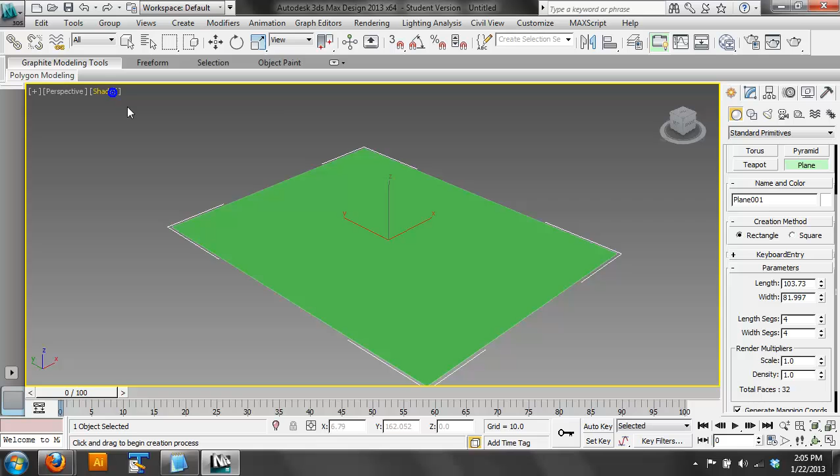But let's look at it in terms of a plane, and this actually gets us to another thing. Planes are really useful because you can start with them as just a simple topological field, right? We have a plane, it has 16 points on it. We can adjust the number of segments to it. It basically becomes a mesh for us to work with, a surface for us to work with.

We can do crazy things with it, like add a ripple modifier to it, which gives us the ability to play with the amplitude, and the wavelength determines the motion of the ocean. The plane is very nice because it gives us a surface to start with, and again, as I always say, the more segments you've got, the more resolution you get. It slows it down, right?

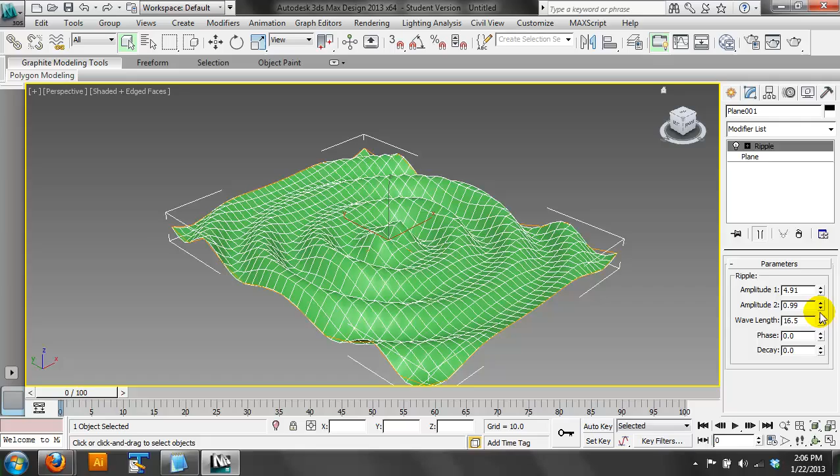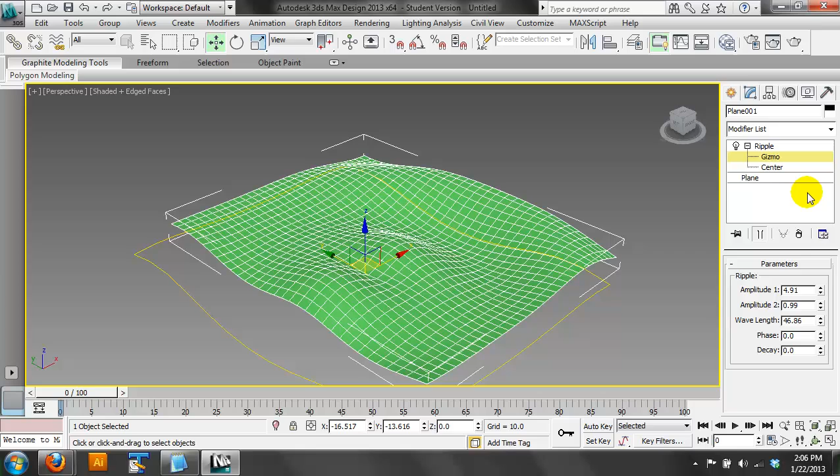But it does actually end up creating a smoother transition. You can also play with the gizmo of the ripple, sounds really weird, and you can move the centroid, move that ripple around in space to get the kind of thing you want. You can adjust the amplitude of it. So if you guys have ever wanted to do these kinds of things in your studio projects, this is one easy way to do it, the ripple modifier.

It gives me a great place to talk about the noise modifier. Now that I've got this surface that I've meshed, if you throw in a noise modifier, this just gives you random garbage. You have a strength in X, Y, Z. The most interesting right now is what? The Z, right? So if I begin to add some amplitude into Z, nothing's really happening yet, we've got to play with the settings here, but this just gives us...

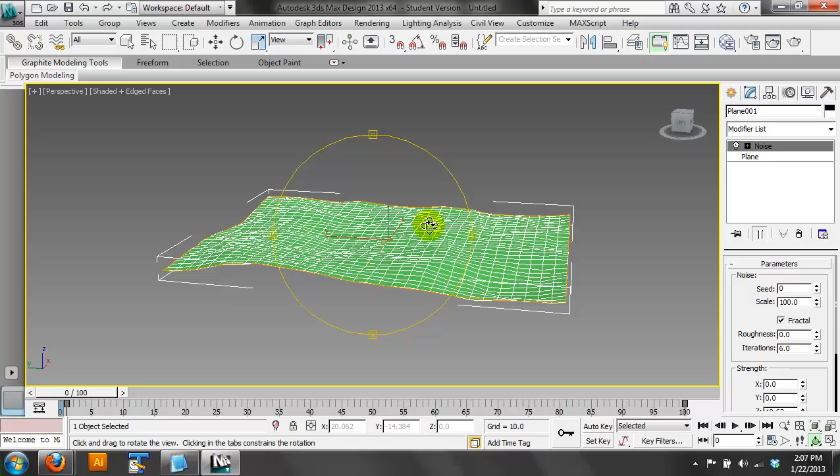You guys remember seed from Grasshopper? It's the random number that starts the calculation. With different seeds we get different output, so if I experiment with different seeds, I just get different configurations of noise.

And I can play with that scale too. I can make a double scale, 200. Actually, that might be the opposite of what I want. Yeah, it's the opposite. So the more you play with that scale, you can get this effect here. And it's just noise, that's all it is.

It's just pseudo-random noise. There's different settings for it. We don't usually talk about this, but fractal noise adds a bit more complexity to it. See that? It's kind of smooth, but now it's got additional ridges in it.

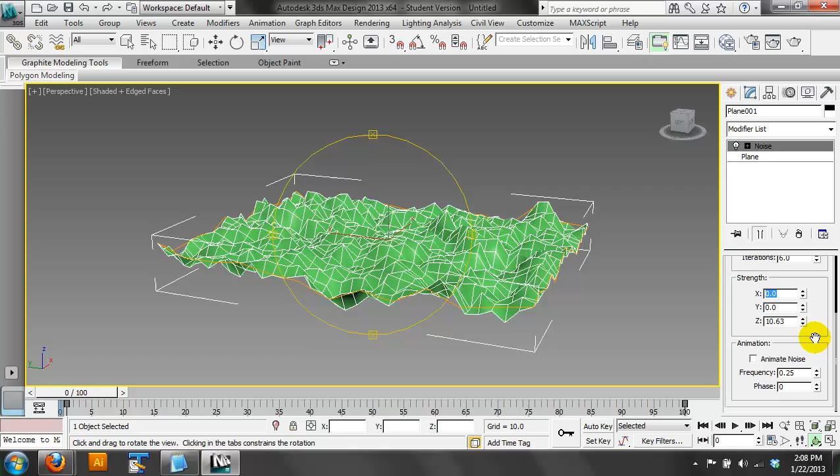You can have X and Y noise, so I can actually have a jitter in different axes. Like I can really mess this stuff up, so it becomes more crumbly, like a piece of paper.

All right, so with that, we can talk about how we would actually do our liquor bag.

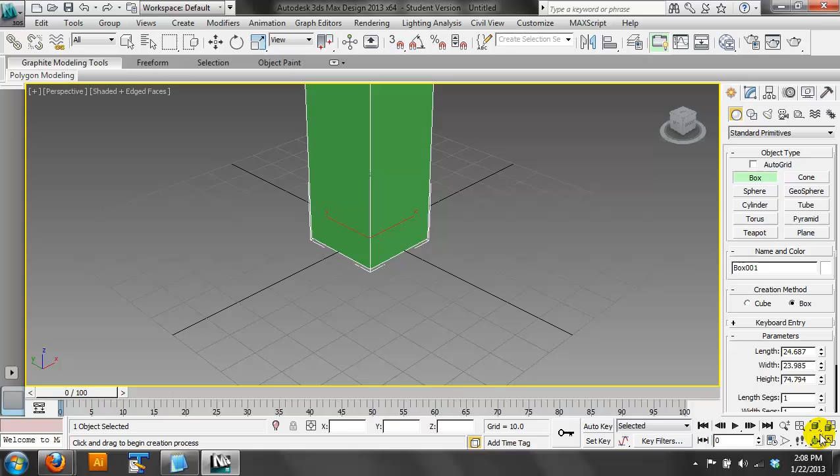Drugs are bad. What's that? Yeah, liquid courage bag.

Okay, so we got our box, and I'm going to go ahead and add some geometry. We need a lot of it, right? Because we're going to be brown bagging it here. So we need some of that, especially in the height parameter.

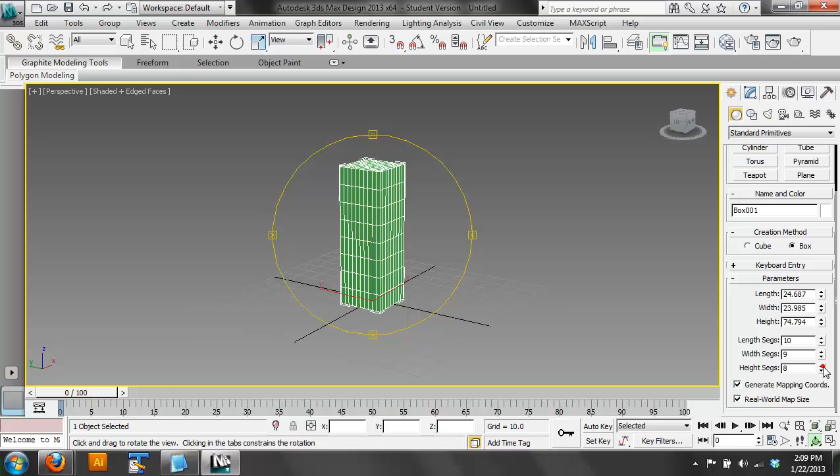So then we've got a lot of information there, and I could go ahead and actually— this actually might have complicated things for me, but let me back up.

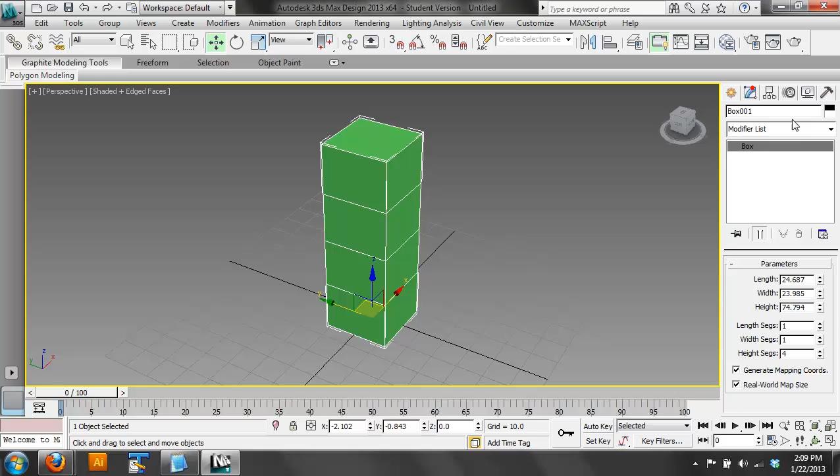What we really need to do is give it a couple of twists, right? I think like Dakota mentioned, it has kind of a twist and it has a taper.

So let's taper some of these at the top, and we'll just kind of eyeball this. We're not going to really be in super control over it, but good enough. It's a demo, so we're not very precise.

That's the issue, and then I'll just sort of start to twist this a bit, twist that a bit. Close enough, we think?

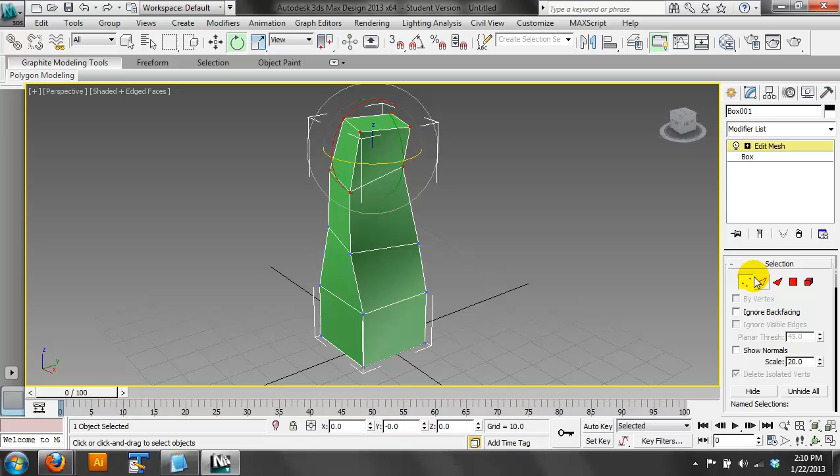All right, then what I want to do is go into Edit Mesh, and I'm going to select these, basically everything above the base. Because I want to keep the base pretty good. This isn't perfect, but it's pretty close.

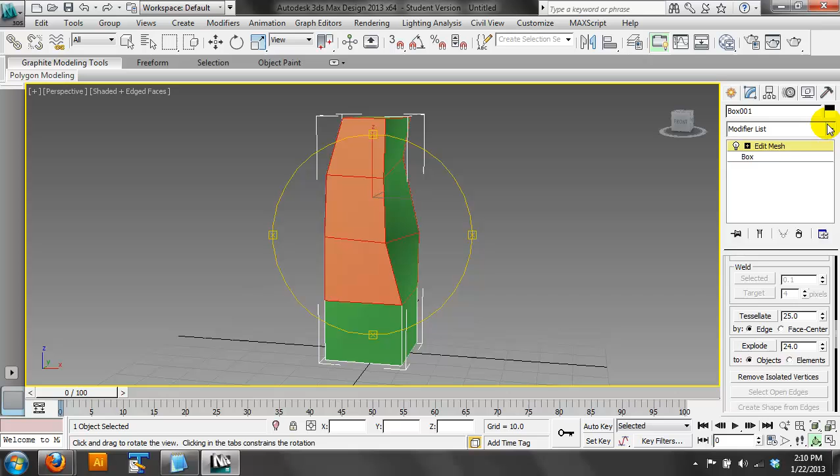Then what I'm going to do is, remember, I want to add some information after the fact, so I actually might want to look at tessellating it, or changing it to polys or something like that. Let's see what tessellate gives us here.

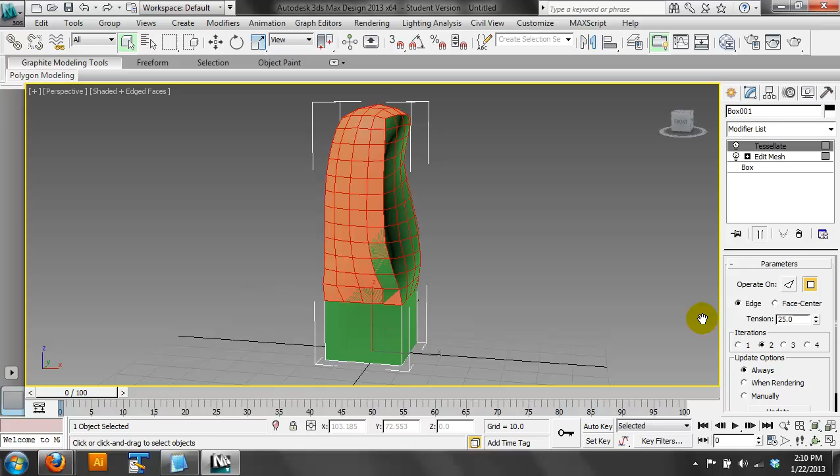Okay, so good, so I'm gonna add some more tessellations. I don't know why it's flickering like that. That is really troubling. Let's see here. What's that? I guess, I don't know.

There we go. So if we have zero tension, we can increase the number of iterations, and we get more meshes, we get more stuff.

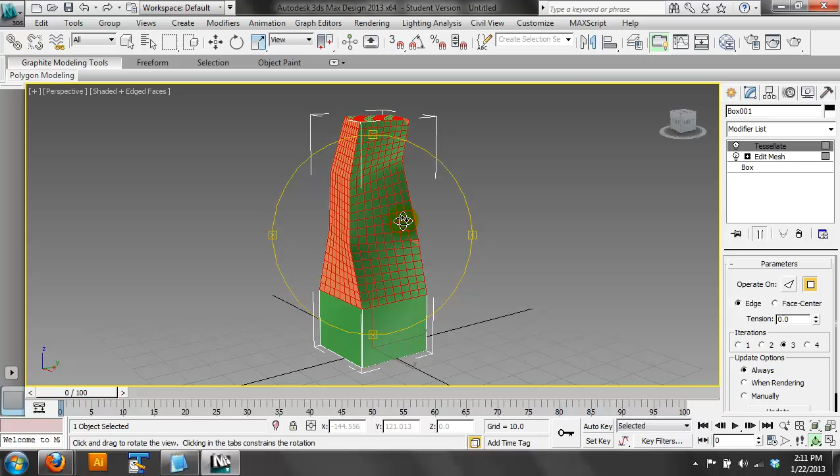Now I'm going to go ahead and add another edit mesh modifier to it because I want to edit it further down the stack here. And actually I want to go ahead and select all the vertices here. Actually, no, take that back.

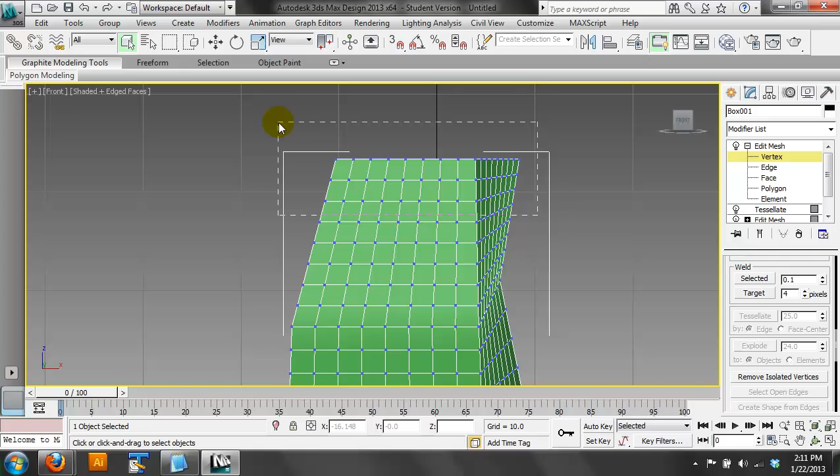Okay, so I'm going to select vertices at the top, the ones that are most—it gets really crumbly, and it gets less crumbly as it goes, right?

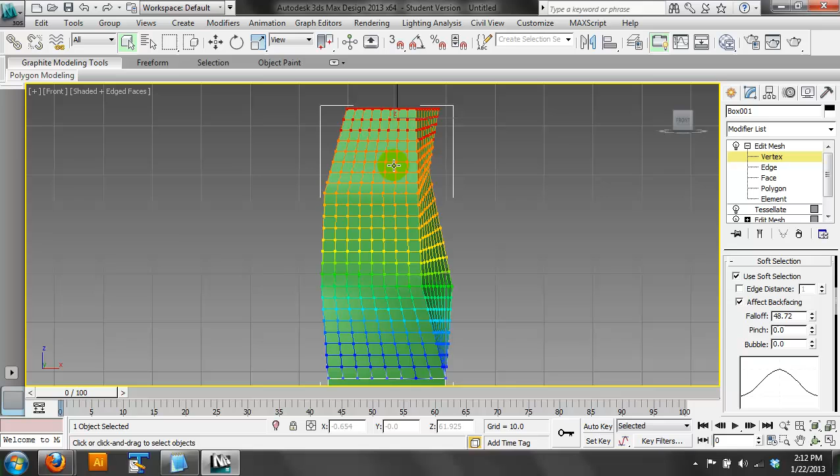So I'm going to go ahead, and we haven't changed this before, but you can do soft selection. What it means is I can select something, and then I can essentially increase that selection, but there's kind of a falloff. So these are really selected, these are kind of sort of selected, and then they're kind of not. You get kind of a gradient effect.

When I apply a modifier to it, like noise, then the effect of it is actually going to be propagated differently down the stack, and you'll see that in a second here.

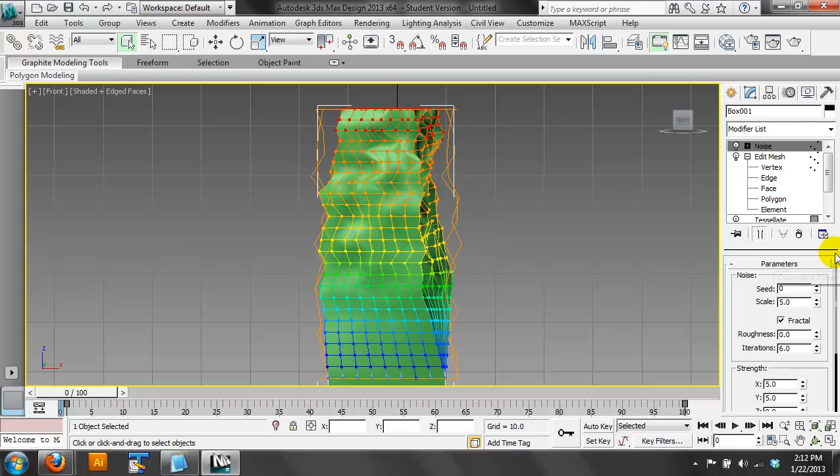So, see how the top is more noisy than the bottom? And let's go ahead and throw a little bit of Z in there too, just for good measure.

Okay, so if I go in, let's go ahead and go to edit mesh so I can just look at this thing as it is. And when that renders, you're not going to see all that other stuff, right? You're just going to see that transition, because that's just the mesh underneath it.

Now that's not exactly what we did. Let me close this off here. I think if I look at this closer, it looks like something happens here and it kind of propagates down a little bit. So I actually probably want fewer polygons at the bottom and more at the top, you know what I'm saying? We kind of want the noise to propagate.

There's too much information from row to row here. We want less rows, okay.

But to go back here, we had the box object, and we only had a few height segments, right? Then we modified it a bit. We went into the base mesh and selected some additional candidates that we wanted to add more information to - we wanted to tessellate it. So we did that, operating on the edge with polygons and a zero tension, and that gives us a square, kind of quads.

Then we went to edit mesh, did a soft selection. We started by selecting these vertexes, used soft selection, passed that up to a noise modifier, and then we just have an edit mesh to kind of kill that stack.

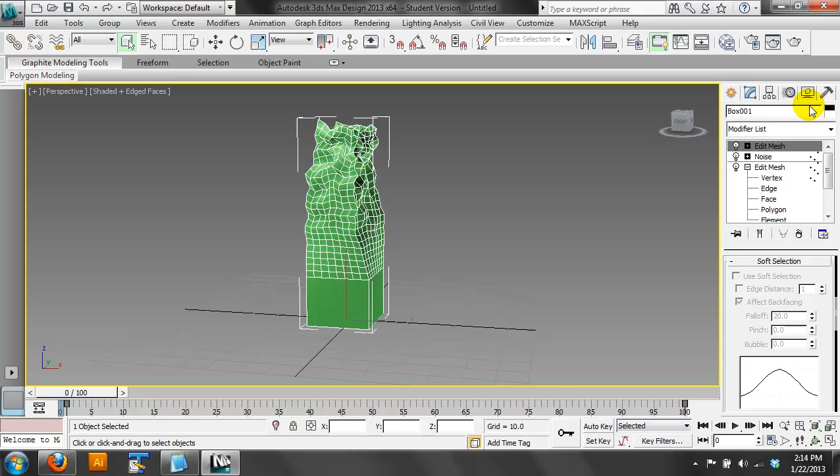In case you're curious, soft selection was kind of a curveball I just threw at you. Check this out, where soft selection might be of use. Remember the example I showed you with the ripple? The ripple, you don't have much control over, right? It just gives you these kind of amplitude waves. But what if you want a bulge in something?

You want like a bulge right there, okay, and you want it to be a certain size and a certain dimension - the ripple modifier is going to be tough to deal with. Soft selection is your friend.

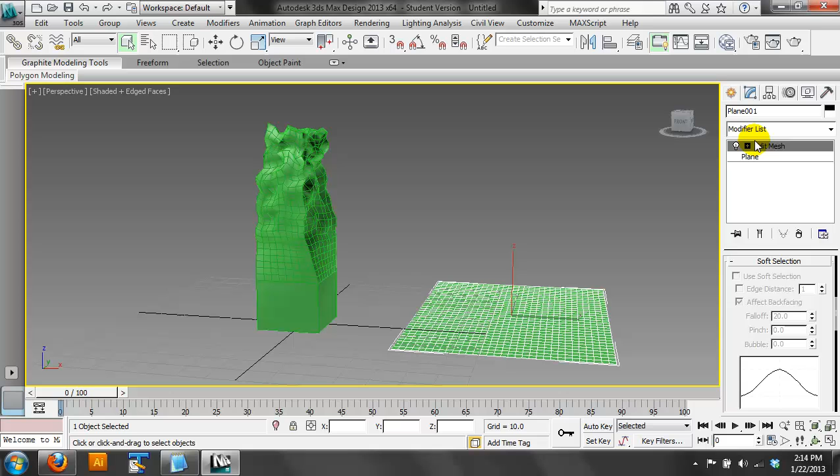So you go to edit mesh, you go to vertex level, you can even pick a point, and you go into soft selection, and there's your... so you can see it. It's just like a diagram here, right?

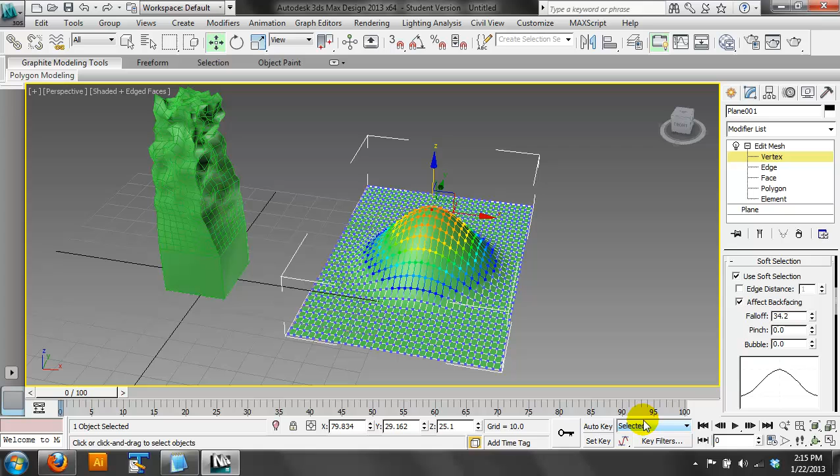Check this out, if I move this up and down. Remember, it's like sort of selected, less selected, not selected at all, right? The middle one gets moved to the full amount, and then everything else propagates out from that - it actually tapers out from that, and you get that bulge in there, okay?

And you can do that - I could go in and pick another one, and do the same thing. I could pick a corner, move it down a little bit, right, and I can start to sculpt this. It's another way to do it.

We saw FFDs, we saw all these other kinds of deformations - soft selection is another method of deformation. It works with anything, basically. You can do it with polygons, you can do it with any kind of selection.

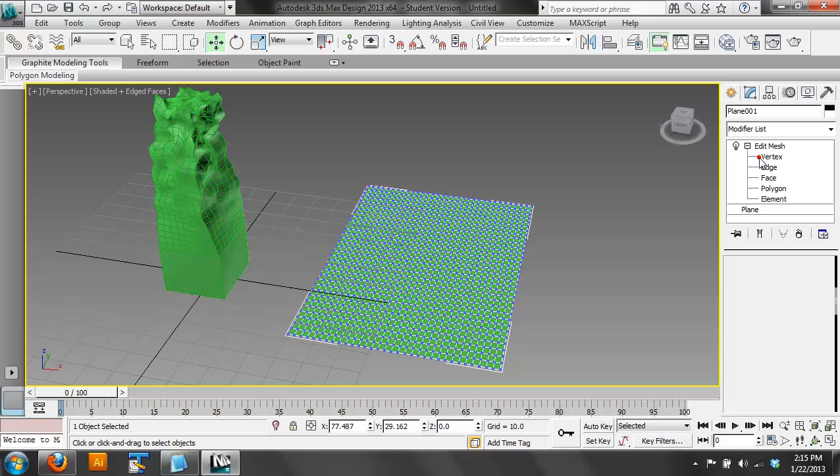Let me back this out a little bit. If I go into that edit mesh again, let me show you this. So soft selection, right? You can control the falloff, which is the distance that you get.

You can control the kind of pinch and the bubble, so you can actually control it. So if I do this, I get kind of a mesa kind of effect, or kind of a navel effect. There's different ways - if you adjust that curvature, that's the kind of falloff effect you'll get with your selection. So you have tons of control over this.

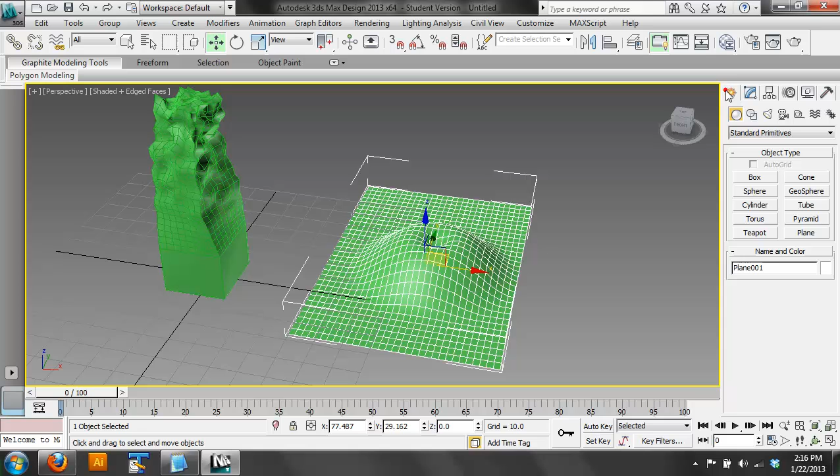And it doesn't have to be in the ground plane or whatever - if I go for this thing, this box here, do it to a box. So you go in and edit mesh, and I can do it right here, and I can do it in the Y even. Okay? So it can be really useful.

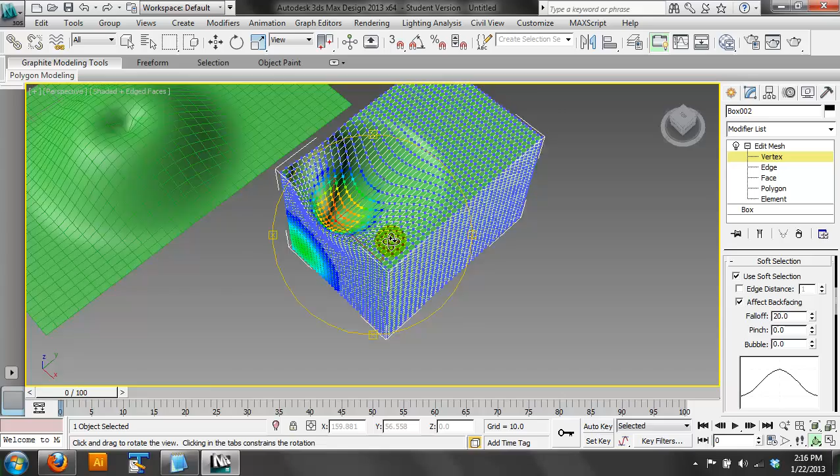Wow, that is really messed up. So there you go, okay. So it works with anything.

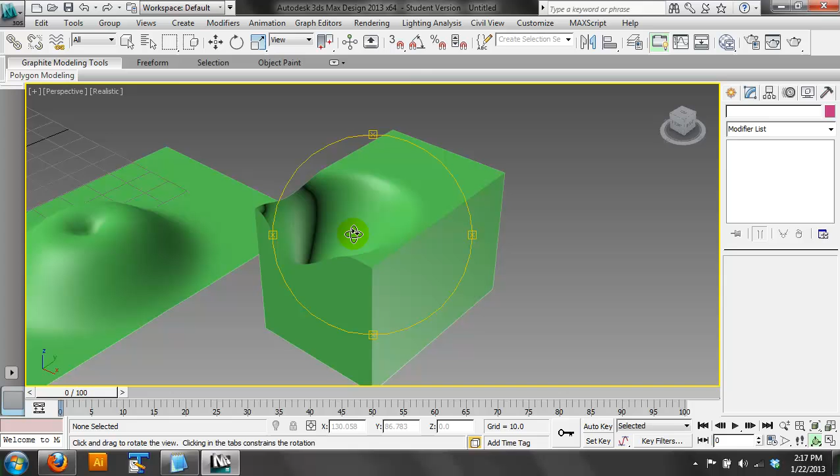Brian, is that long-winded explanation enough to answer your question about the bag? Okay, do you guys have questions about that? That was something I wanted to cover later, because I think that's something important.

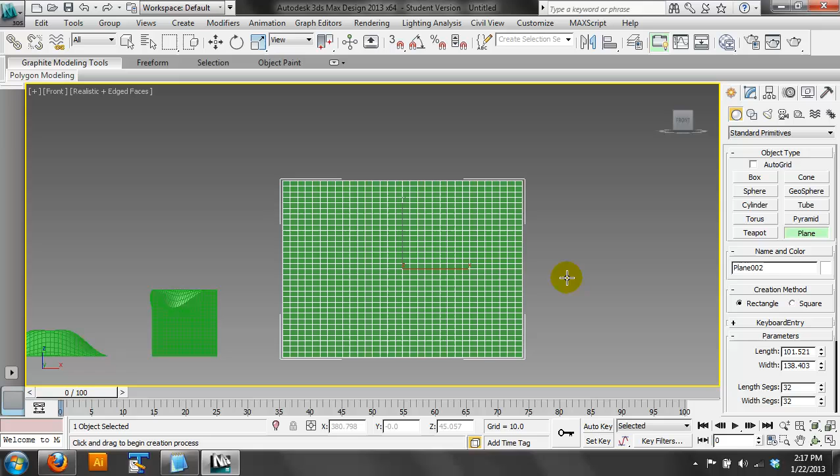I think the noise modifier can be really useful, guys. This is another example that I like - if you had something, let's say you have a rock wall or something, right? You can go in and go to edit mesh again, same thing really, I guess, and just increase that falloff range - and maybe I want a different kind of falloff here.

And then you can apply the noise modifier to it.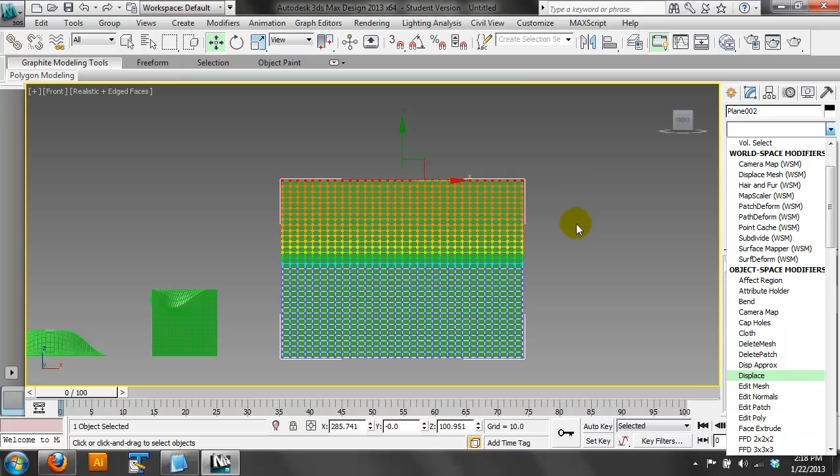Can you change the direction of the fall off? Say if you were to select one of the corners, you want to go diagonally across the surface. Well, it would go diagonally if you selected it. Yeah, it's round though is the thing. It's always like round, basically. That's kind of a bummer about it.

But you can even manually do this kind of edge distance thing too. You can actually manually select that as well. You get kind of fall off, but yeah. So then you can just apply.

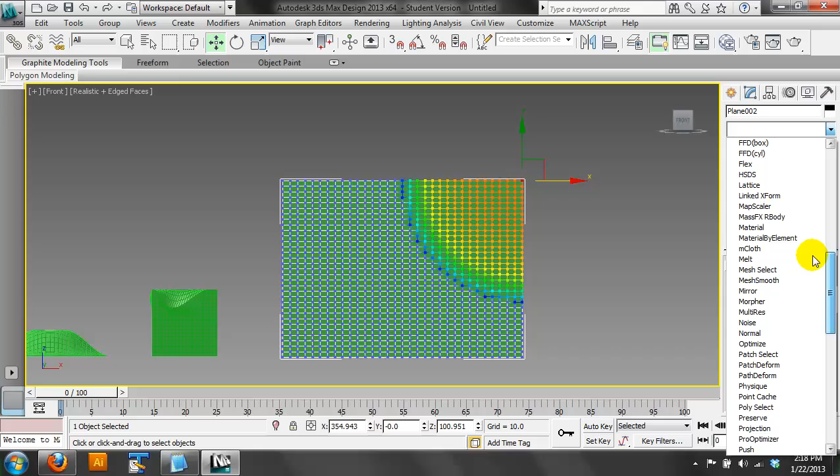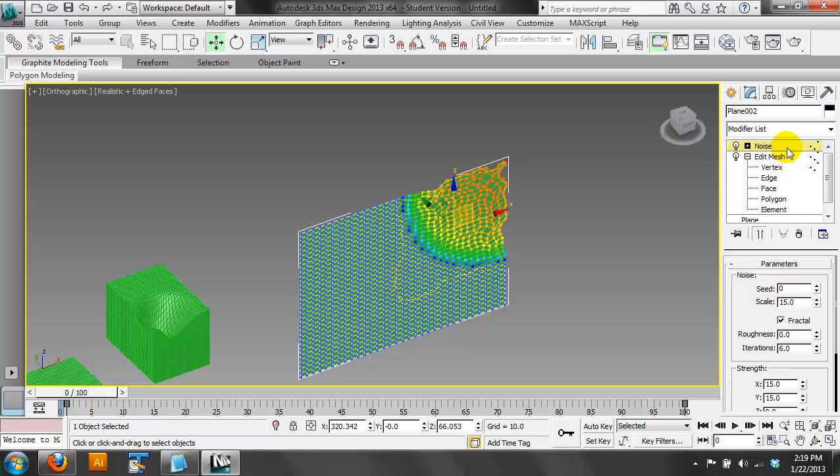So if you want to erode something, give it the sense that it's going from a nice concrete wall to one that's kind of crumbly, you can add this effect to it, which can be really nice. So if you just want to have a corner that's got that effect, same as our bag example really. You can just do that, and you can have it start from the top of the wall. I don't know if you guys can read that as well, it's kind of dark, but okay.

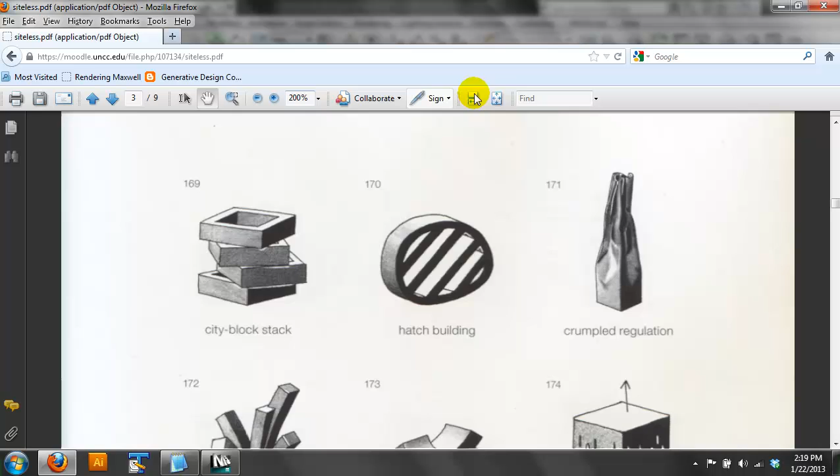Good. Any other forms you guys have questions about? Actually, I didn't do that in the Y there, but anyway. There's one farther down the - okay, yeah, these two, there we go. Which one - can you point it out to me? You know which page it was on? I think it's near the last page. Oh, okay, cool.

What do we got? It looks like a crumpled, almost crumpled bag. This one? Yeah, okay. So what can we do? I mean, now that we did this last piece, I think you have all the tools for it. So what would you do?

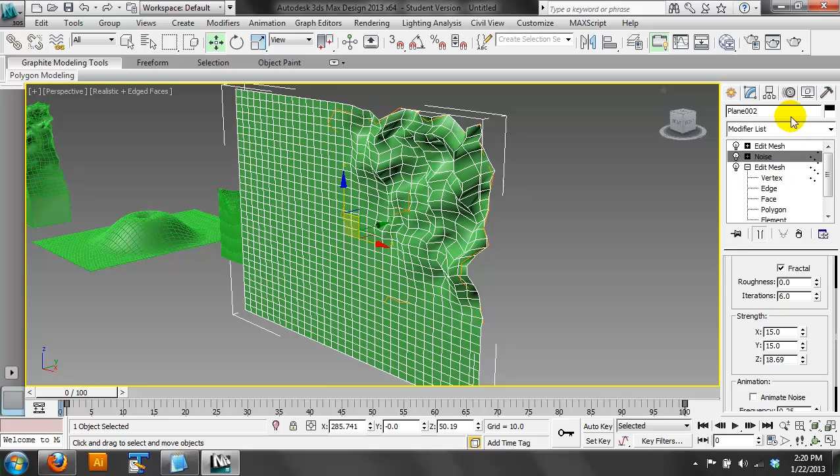Sphere with noise, pretty much, yeah. If you really adjust that Z, that kind of puckering, that's what's going to give you the sort of ridges that you want, right? Like in a brain. Actually, you know what, nothing's better than just doing it. Let's see what we get.

Let's see here. So let's see what noise gets us. It's interesting because the sphere has got stuff going on in all directions.

Oh, here's an interesting thing too. If you're going to apply the noise piece, you really have to apply it. You have to add an edit mesh and apply it because you want to be adding noise to the vertexes. Does that make sense? Like you got to be moving something. If you just apply noise to the object, it's going to jump around like it's had too much coffee - it's not going to deform until you get to that topological level.

What a terrible interface though. You got to scroll down this little list and pick your little thing out.

Okay, and I think this is going to be - we're going to want roughness, and I think let's just see what we get here. If we have to increase the strength of it, we will. And that might be the most roughness that I'm going to get here.

Okay, the trick is if you do it too much, you don't even have a circle in it - you don't even have a sphere anymore. But I think if you have more geometry in the sphere and a little bit less noise, I think you'll get that.

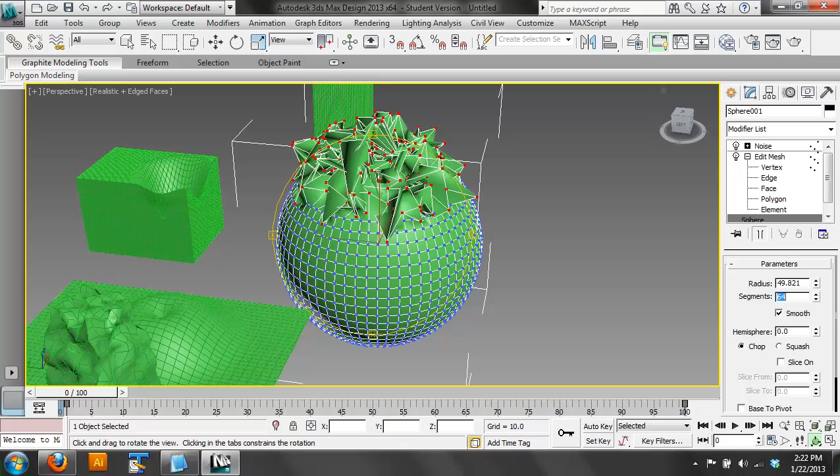Okay, but I think if we applied this idea to it, we would probably get the effect you want. Just might need to adjust it somewhat. That's the thing I love about Studio Max, is that if we don't like what we see, we can always just parametrically adjust things.

That's actually going to get me to the topic of today, which is animation. So I told you guys everything in Studio Max is parametric because it's going to be animated at some point. It's intended as an animation tool. We haven't talked about that yet, or about the potential for that in design.

How many of you guys know who the architect Greg Lynn is? Have you guys heard of Greg Lynn? I know a few of you do.

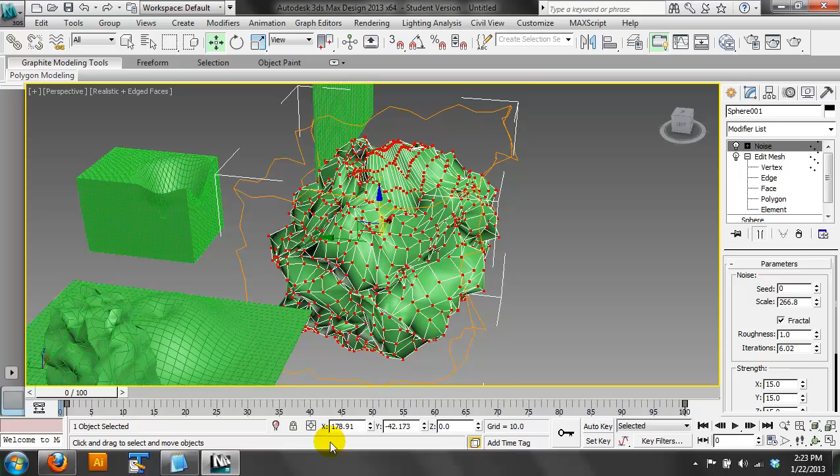Greg Lynn gets a bad rap because he's considered the founder of, or the poster boy for, blob architecture. But it's still an important mark in time, and I think even though our craft and tools have gotten better, we're still kind of in the blob era, or in the shadow of the blob. It's like a horror movie. The blob was thrown out as an insult, the idea that it was all form, or had no form, that it was something out of your control. In the movie The Blob is this gelatinous thing that swallows everything and oozes through things, and I think that's what people kind of saw.

Lynn's architecture was really based on Studio Max and programs like Maya - animation software. They didn't have Rhino, they didn't have sophisticated tools like SolidWorks, or if they did, he didn't know how to use them. He was building on a tradition of computer animation that he encountered, and he was interested in the potential of animation as a generator for architecture.

He was the Jackson Pollock of using animation to make architecture. Just as Jackson Pollock might have been the first person to really realize the potential of throwing paint, and everybody else who throws paint, whether good or bad, always gets compared to Jackson Pollock - Greg Lynn was the first guy to really do animation and really get noticed for it.

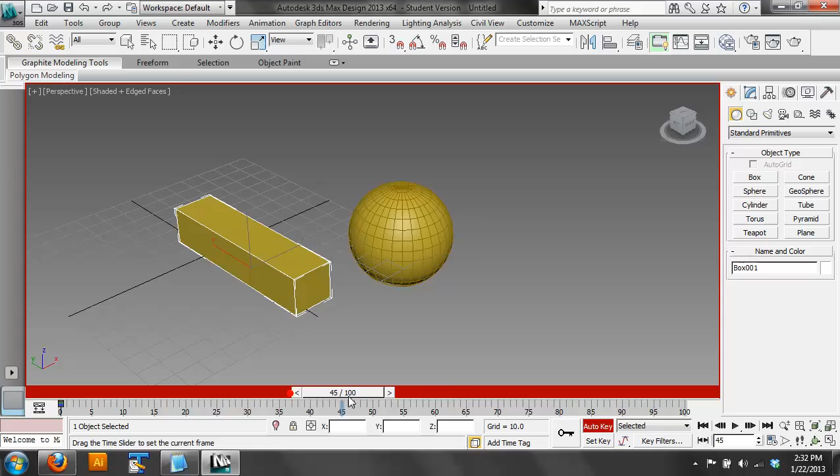Yeah, okay. The only thing is you got to be careful about making sure that if you're going to make the transformations, you need to be on the frame where you make the transformations. So that's a gotcha, because the auto key is going to start to insert keys as you go. Let's see if that works. Yeah, sometimes you don't even need that. I hit the key button because sometimes I worry that auto key is not making keys, but it looked like it did.

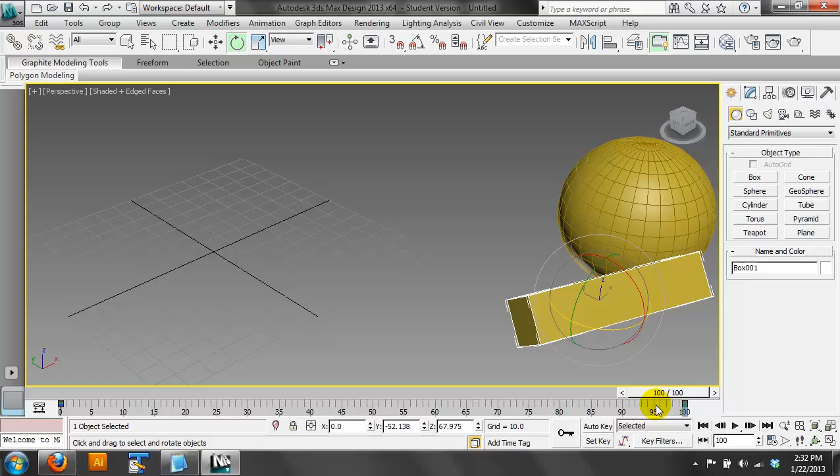So you can morph like anything. You can morph the shape changing, change where it is, change the size of it, the scale of it. Go ahead and play with that for a little bit.

Spheres are kind of bad because they don't really show rotation, right? Because you rotate a sphere, it looks the same as any other side. If you texture mapped it though, it would look like something. I see Gil's got a teapot - that's a good object to play with.

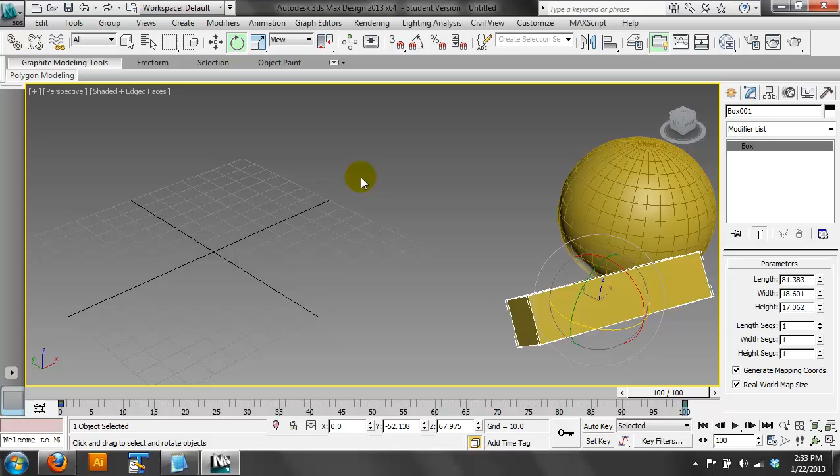You can animate anything. Any setting that has a little slider on it, like the ones we've looked at, basically. So if I even added a bend modifier to this, I can animate the bend modifier if I wanted to.

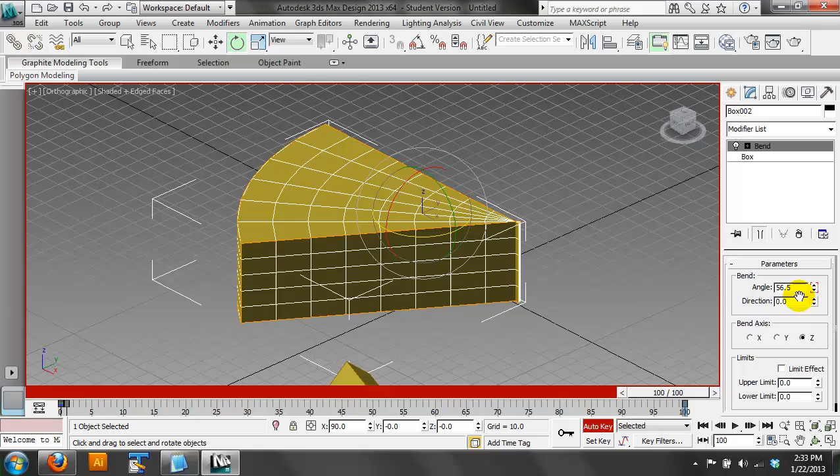Let me go ahead and just start a new scene here. So the steps: you make an object, let's just start with a box for now. You turn on auto key - it's probably important to make sure your slider's at 0. Click the key, and then you see you get little boxes down there. Those are your keys, and the key is just the data, the stored animation data - the position, the rotation, whatever.

Then you change the slider to another frame, and you do something to your target. Then you click auto key to turn it off. Red means you're recording, and that's it basically - you get the sequence.

It does, so I'll throw a modifier on here. Let's see, what do I want to do? Let's do noise. So I've got a modifier on there, and I'm going to get some information into this thing. So, I got a modifier.

I'm gonna go auto key, I'm gonna key it, and then if I move it and change something about it, let's just change the frequency or something. You see how they turn red, these little things here? That means we just animated something. And then if I auto key off - oh actually, okay, so I was recording.

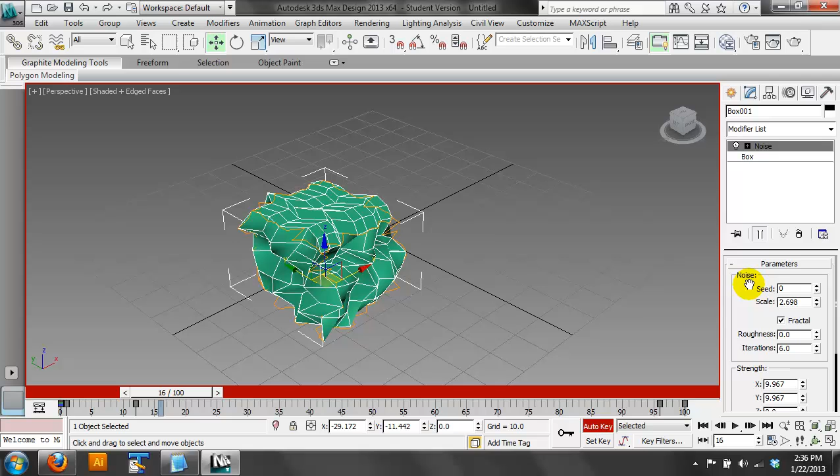Let's do that, let's go to auto key. If you change it and change it back, then you get the recording mode. And then let's change it to something different here, and let's see if that's going to do it. Yeah, there we go.

Again, anything that's an element, especially the ones that have the little spinners, can be animated, and the keys are left behind. You can move the keys around if you click them and select them. You can change the rate at which the transformations happen.

Like I said, this thing goes really deep. I don't want to get too deep into it. I think the most important thing though is just to remember: in architecture, transformations are absolutely key. Rotate, move, scale—you can do so much with that. That was all the Renaissance, all of the Greeks and everyone before that. It was basically about transforming shapes.

Okay, so everybody have questions about this? I want to show you one thing, and then we'll quit for a minute. We'll take a break. Any questions? Okay, I'm going to show you something. Let me show you something. Okay, where you get into Lin territory.

So moving stuff around, animating stuff is not that cool—that's just animation. Maybe for diagrams or for a client, showing how some parts go together, something like that, but less useful. I'm not very excited about that, personally.

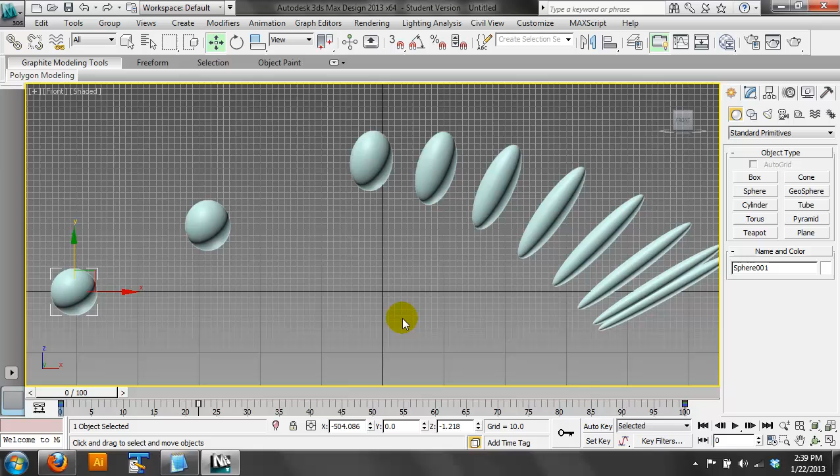Where you get into architecture, or where it can be really interesting, especially as a diagramming tool or a schematic design tool, is if you take all of those transformations and display them at the same time. So if you go to Tools and go to Snapshot, you can say I want a range of snapshots from 0 to 100 and make me 10 copies. And you can play with the parameters of that.

And in fact, I will, because I am your teacher. And we will make 100 copies. Oh yeah, these are all objects, guys—that's what's cool about this. You have everything, you have the raw stuff to do whatever you want with. You want to boolean them together, you want to fab those, you want to take a shape and morph it.

There you go, right? So if you think about the transformations as a beginning state and an end state, or as a series of operations over a set amount of time, this will just produce all of the interpolated geometry for you. And that's what we got—that's sort of what happened with Lin's thing. That's okay.

So this is, I have a shape, right? I had an edit mesh, and I apply some transformations to it, and let's say I do 4 snapshots of it. There you go, all right. And that's probably what he did. Yeah, so, why not?

If you're recording and you do that, can you adjust those shapes and move them around and have it put that into the recording? No, but since I've fixed those in space now, I could sure animate these if I wanted to—I could do all kinds of tweens and things with them. What's cool about it is it just bakes it; you get all of the geometry back.

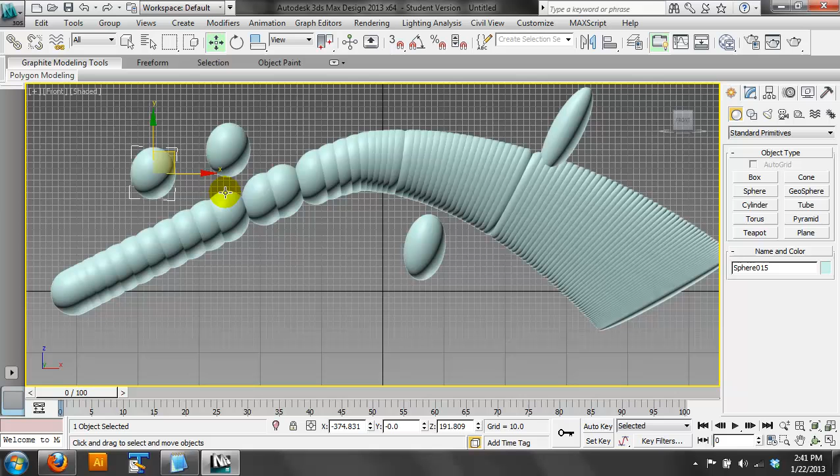Okay, so depending upon how imaginative you are and how three-dimensionally you think in space, it can be really interesting, right? You can get a lot of interesting forms out of these.